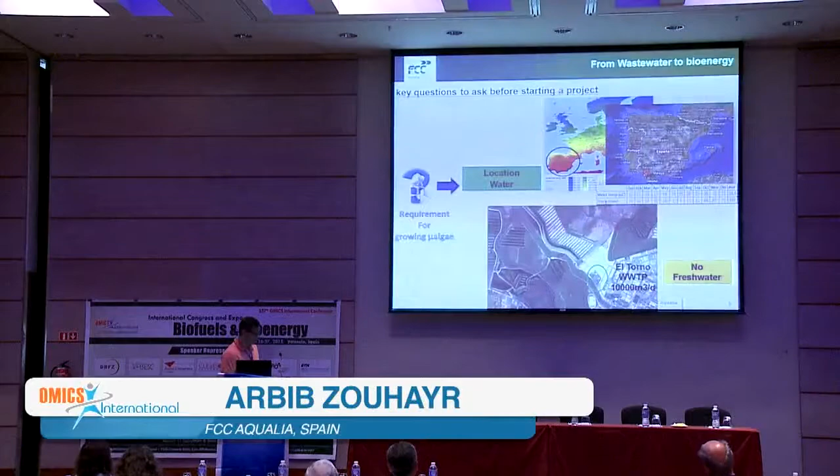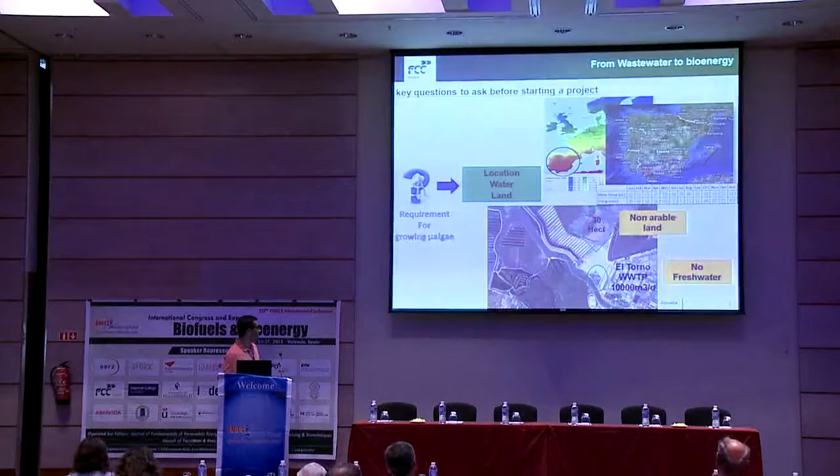And the third question is the land. As in the other case, depending on the technology selected, open system or closed system, cultivation of algae requires a high amount of surface, especially the open systems. So we must select non-arable land for not competing again with the human needs. We selected Chiclana de la Frontera because we have hundreds of hectares of abandoned salines ready for using and growing algae.

Another interesting question to solve is what kind of photobioreactor. I think Dorinde showed us a great presentation about the comparison of technologies. But according to our experience, there is a long-term discussion between the advantages and disadvantages of open and closed systems. But this comparison must always be made considering your final objective of the biomass.

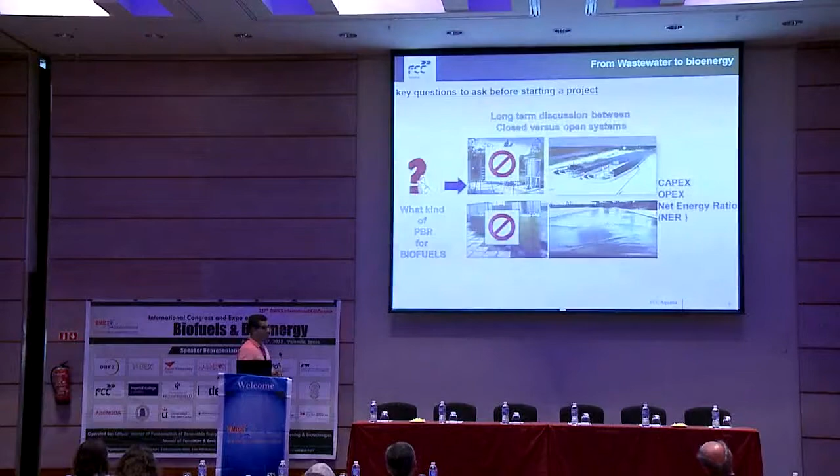In our case, deciding what kind of photobioreactor to use was very easy indeed. We analyzed the capital cost, the operation cost, and the net energy ratio. For biofuels, you must do this deep analysis of what kind of photobioreactor to implement at the end. In our case, we decided not to use a closed system because the capital cost is very high, and according to our calculation, the net energy ratio is lower than 1, so we are not interested in it. We are putting more energy into the system than the energy we can get from the biomass.

And of course, the well-known disadvantage of this kind of system is contamination. But we work with wastewater. We don't care about contamination. The low control of the process: our objective is to have a very simple process, so we don't want to control every parameter of the raceways or the downstream of the process. And of course, the low productivity in comparison to closed systems.

Summarizing a little bit, the big questions to solve: first of all, select properly the location where to implement your project. Light and temperature are very important. No drinking water, no arable land. We don't want to compete with agricultural activities. We must use robust, simple and low-cost photobioreactors. And finally, in our case, we want to work with open systems and wastewater, so we cannot try to work with pure systems.

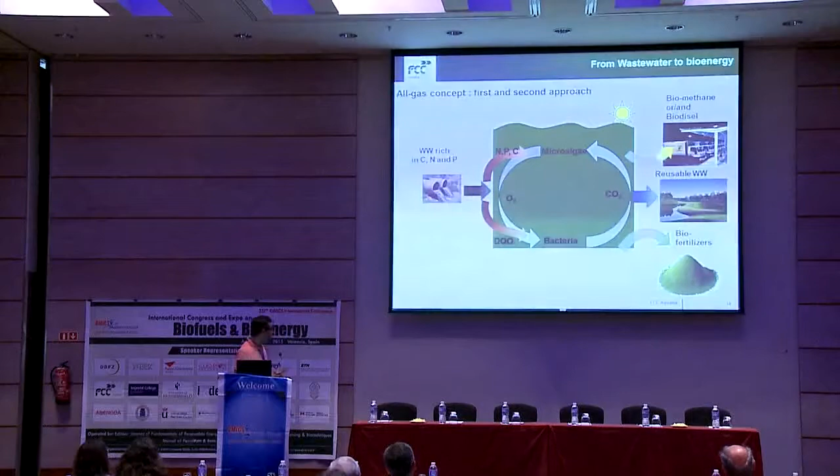The Allgas process is based on the interaction between microalgae and bacteria. When we have these two microorganisms together in a culture medium, they work symbiotically. That means that the microalgae use the sunlight and the nutrients contained in the wastewater, mainly carbon, nitrogen, and phosphorus, to grow, to multiply, and to produce oxygen. This oxygen is used by the aerobic bacteria to degrade the organic matter, the COD, and to transform it into CO2 and water. This CO2 is again used to satisfy the microalgae inorganic carbon demand.

So we produce biomass for biomethane or biodiesel, and reusable wastewater. We have an economic benefit by treating the wastewater, which is an added value of our system. And also we have a biomass with great biofertilizer capacity. This is the first approach of the Allgas project. The second approach is based on the fact that wastewater has a high energy content, around 4 kilowatt hours per kilogram of COD contained in the wastewater.

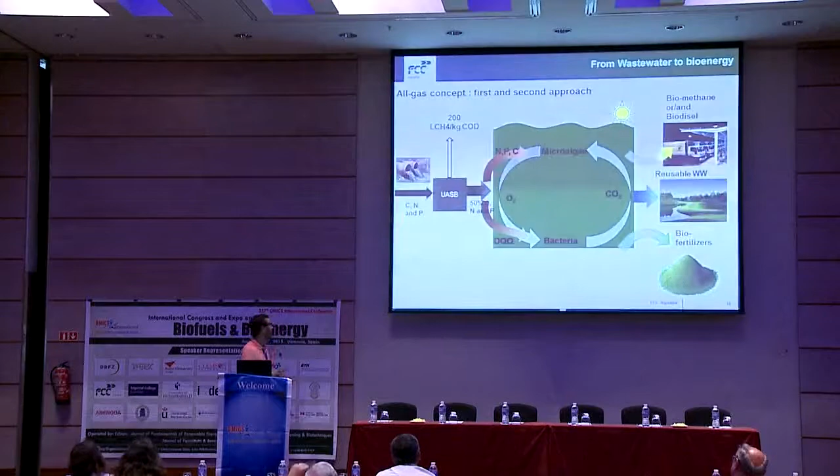So the second approach is based in the pretreatment of this wastewater by a UASB reactor, an upflow anaerobic sludge blanket, where we transform part of the organic matter contained in the wastewater into biomethane. The average yield of biomethane of this system, operating at ambient temperature, is 200 liters of biomethane per kilogram of COD. And the rest of the nutrients, the nitrogen and phosphorus, remains constant. So we send it to

the algae ponds. Now I will show you one of the final diagrams of the All-gas project. As I said, we pretreat the wastewater in UASB reactors, big-scale UASB reactors. We produce a biogas, which is composed by biomethane and CO2, and a pretreated effluent, which we send to the cultivation area. In the cultivation area, we remove the nitrogen, phosphorus, and carbon, and we produce biomass. Then we harvest, we pre-concentrate the biomass in a harvesting skid.

And here we have two alternatives of managing the biomass produced. In alternative one, which is the most attractive for us, we digest directly the biomass obtained after pre-concentrating. We reach 3–4% of total suspended solids. We digest it, we produce a biogas. The CO2 produced in both anaerobic processes, the UASB and the anaerobic digester of the biomass, will be used to satisfy the inorganic carbon demand of the ponds, together with the CO2 produced by the bacteria.

The biomethane produced in both anaerobic processes will be mixed, upgraded, and sent to a gas station to feed the Volkswagen cars. The residual biomass of the anaerobic digester will be dewatered in a centrifuge. We don't care here about the energy because the flow is very small, because in the previous pre-concentration step, we concentrated at least 100 times the volume. Then we solar dry the dewatered biomass.

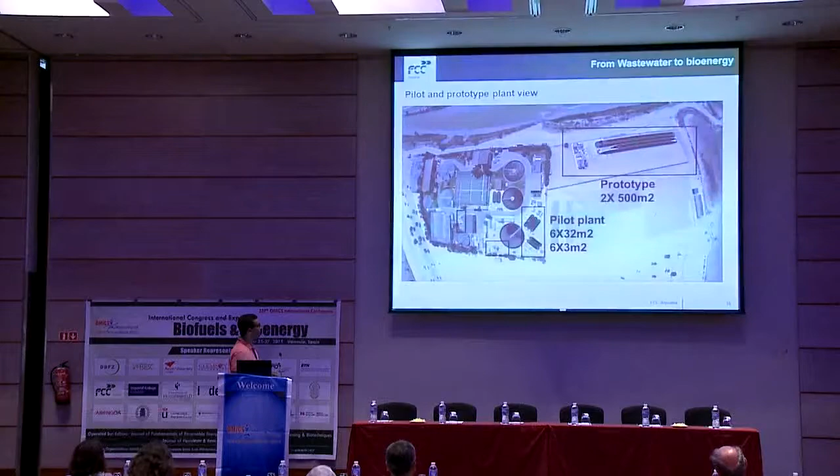So this is an aerial view of our plant in Chiclana de la Frontera, the pilot plant inside the wastewater treatment plant, and in an external area, we have the prototype plant, 1,000 square meters. The pilot plant is composed by a complete pretreatment of the wastewater, composed by three 20 cubic meter UASB reactors, and a complete downstream upgrading of the biogas, composed by sulfide removal, methane stripping, and gas holders.

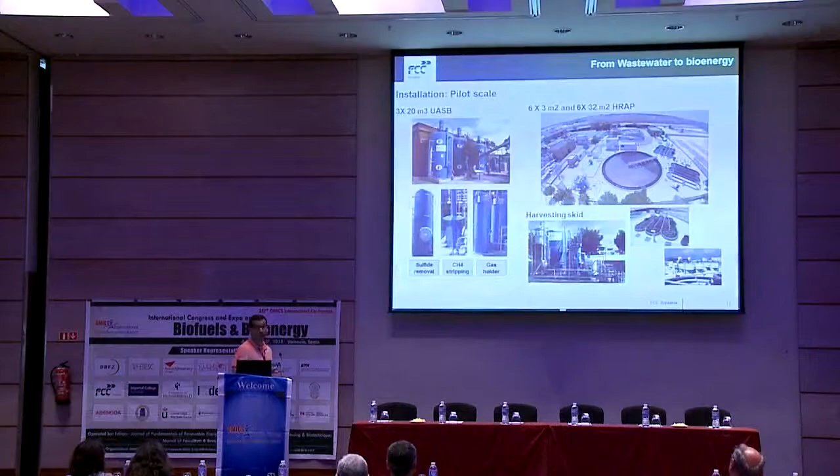And the cultivation area of the pilot plant is composed by six 3 square meter ones, those ones, and six 32 square meter, those ones, high-rate algal ponds, and a complete harvesting skid where we try to harvest the biomass through sedimentation, filtration, and dissolved air flotation. And the option that worked better was the dissolved air flotation process.

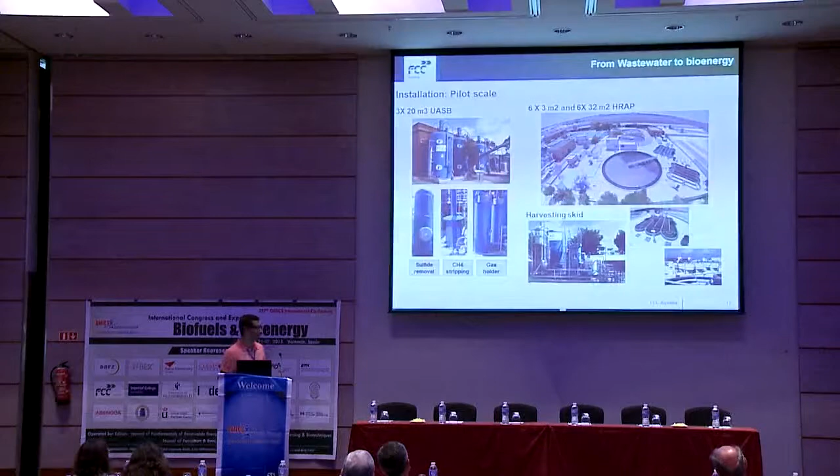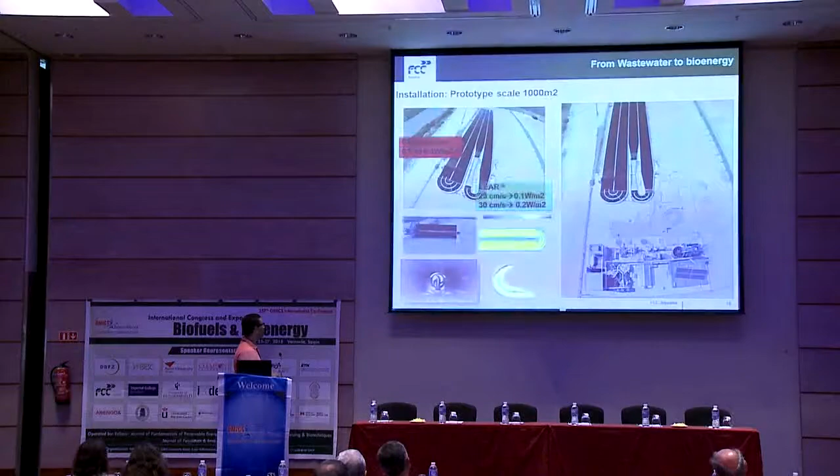The prototype plant, regarding the cultivation area, is composed by two 500 square meter reactors. The left one is based in the typical raceway pond, where the liquid is circulated by a conventional paddle wheel. And the right one is a new innovative low energy algae reactor, where we made a deep modification of the bends, and we changed the paddle wheel by a flow booster with a submersible mixer. What we got with this modification was a drastic reduction of the energy consumption in the step of cultivation, which was very high.

Operating at 25 centimeters per second of liquid velocity, we passed from 0.6 in the paddle wheel to 0.1 watt per square meter installed in our installation. Regarding the downstream of the prototype plant, it's composed by pre-concentration based in a dissolved air flotation process with a treatment capacity of 20 cubic meters per hour. In this step, our minimum concentration factor is 100, and we can reach even 150 and 160.

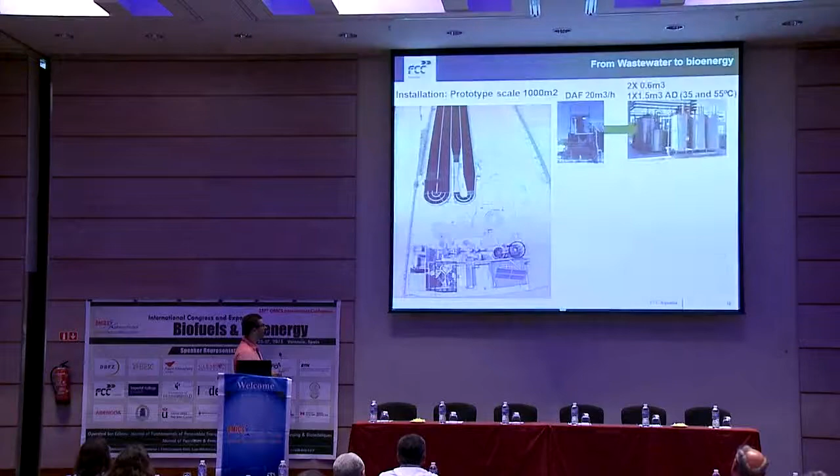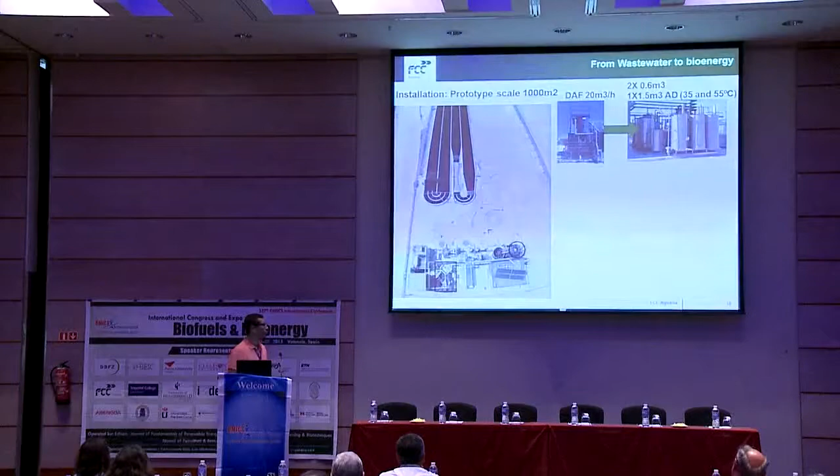Then this pre-concentrated biomass is sent to the anaerobic digesters. We have three, two of 600 liters and one of 1,500 liters, operating in mesophilic or thermophilic range. As I said previously, the residual biomass is centrifuged in a decanter centrifuge, largely used in wastewater treatment processes.

The wet biomass is sent to a greenhouse solar dryer provided by Huber, a German company. This solar dryer is enhanced by air solar collectors, so we reduce the solid retention time inside the greenhouse to reach a final concentration of solids of 95%, 5% of water.

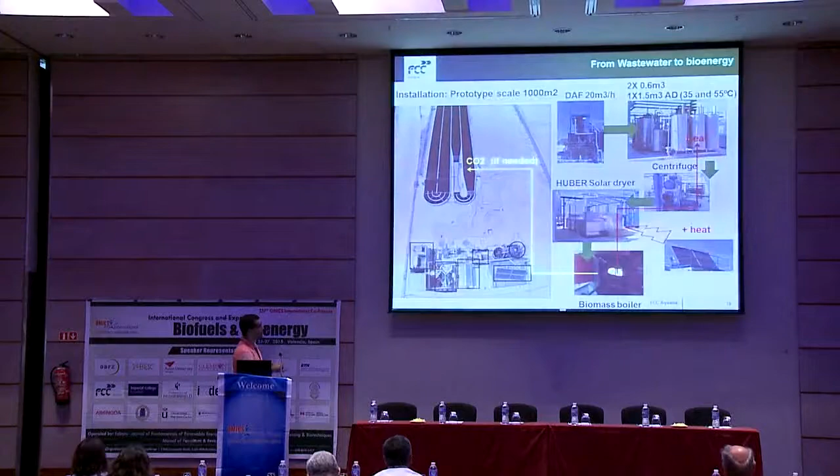Part of this dried biomass, mixed with green waste, is burned in a 25 kilowatt biomass boiler. Part of the CO2 we send to the ponds, and the excess heat we send to the anaerobic digesters.

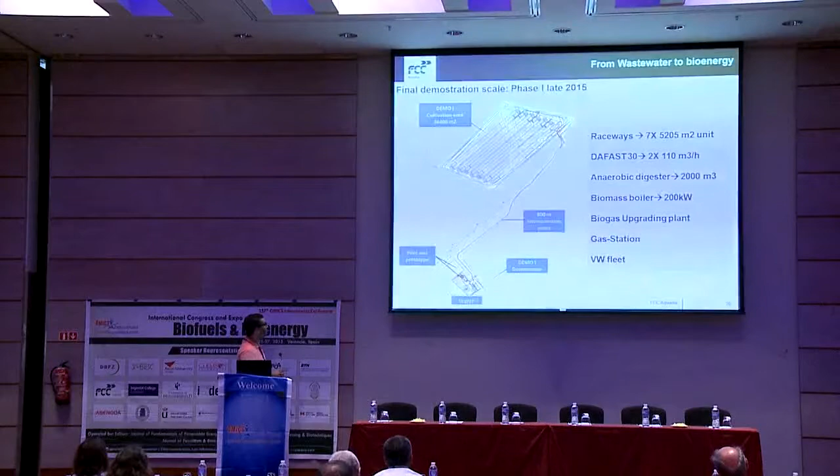This is the pilot and prototype, and this is the view of the space that we have available for scaling up the process. It's near the wastewater treatment plant, and we have more than 100 hectares available for upscaling our process. The demo, the first stage of the final 10 hectares, will be composed of 7 raceways of 5,200 square meters each.

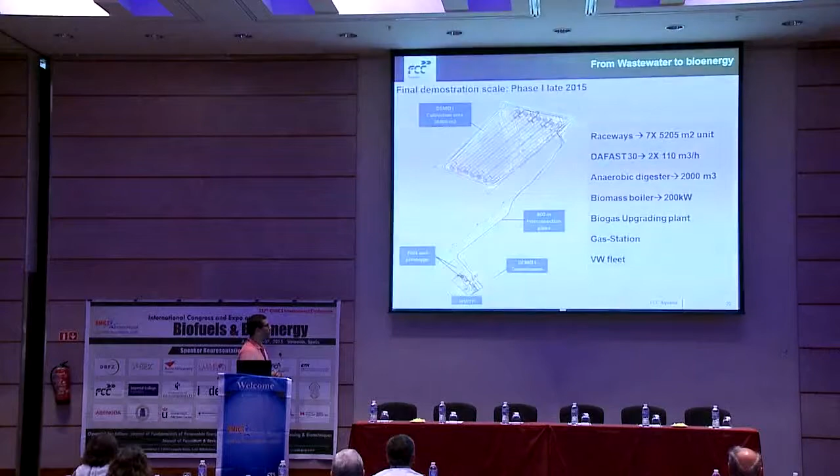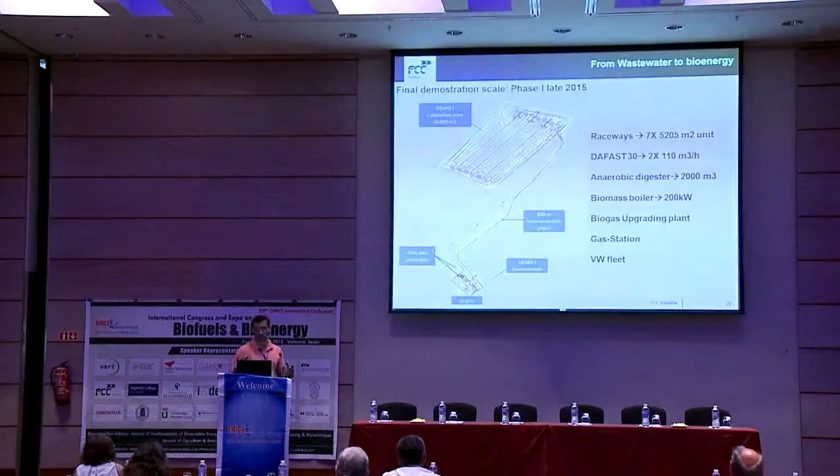We will also install 2 units of dissolved air flotation systems with a total treatment capacity of 220 cubic meters per hour, a 2,000 cubic meter anaerobic digester, a 200 kilowatt biomass boiler, a complete biogas upgrading plant, a gas station, and a Volkswagen car for testing the gas obtained in our plant.

2 minutes? Oh, 2 minutes.

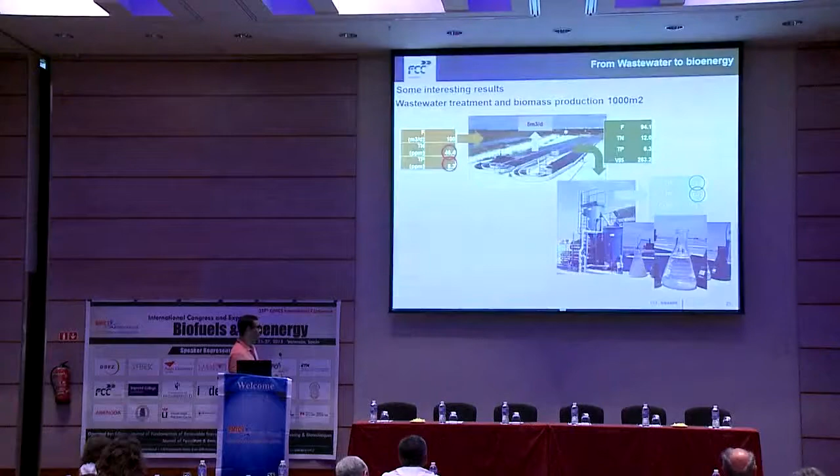Regarding the biomass productivity, we are between 75 and 110 tons of total suspended solids per hectare per year. We are near the target of the FP7 call, which was 90 tons per hectare per year.

Regarding the bioenergy capability of our process, we operated 3 anaerobic digesters in the mesophilic and thermophilic range of operation, and the results obtained were similar to those obtained in the conventional wastewater treatment plant. But we have to note that the biomass produced in the All-gas process is 3 or 4 times higher than in the conventional wastewater treatment plant. Therefore, the energy production capacity of our process is very high. But we know that we can increase this biomethane yield even further.

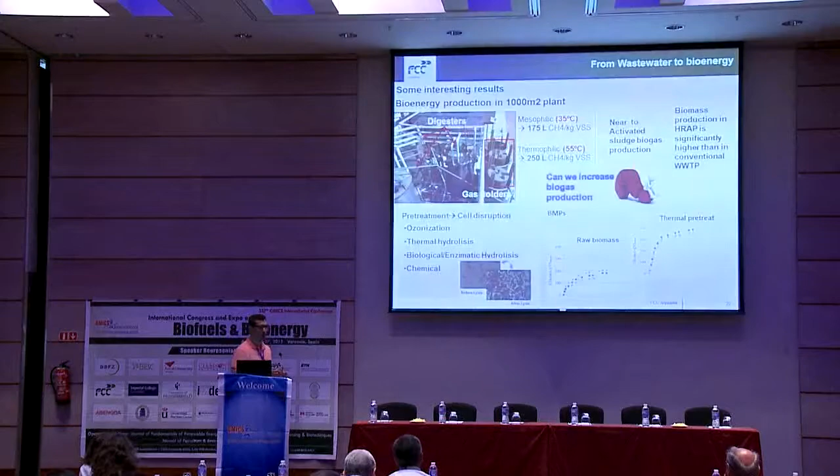Now we are working on pretreatment of the biomass with the aim of cell disruption, of the cell wall of the algae. We are testing different techniques: ozonization, thermal, enzymatic, and chemical. This is just an example of some BMPs, biomethane potential experiments, obtained with raw biomass and thermally pretreated biomass, at 170 degrees Celsius and 6 bar of pressure. And as we can see here, we can increase the biogas yield of our process 2 times.

And finally, using all the data obtained in the prototype plant during 1 year of operation, we made a balance where we compare a conventional wastewater treatment plant, at your left, and the All-gas process: the final 10 hectares of cultivation, or 10,000 cubic meters of wastewater treated. Regarding the electrical consumption, with the new concept of the All-gas project, we can reduce the energy consumption required for treating the wastewater by more than half.

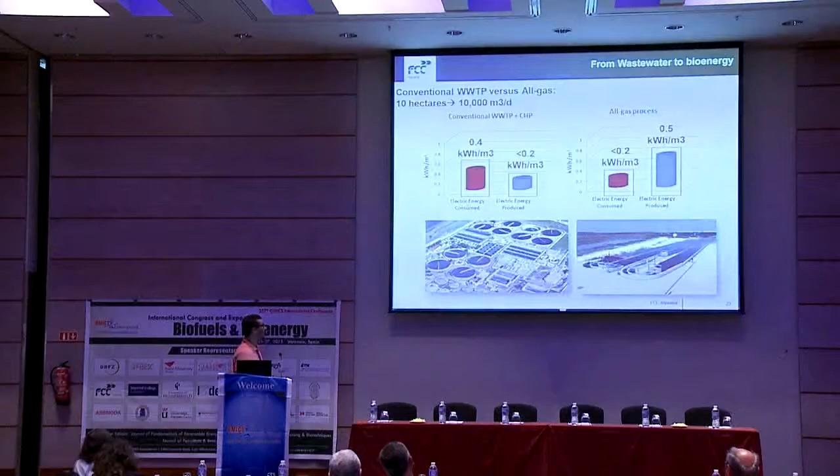On the other hand, the energy produced in the conventional wastewater plant is lower than 50% of the energy demand of the plant. In the case of the All-gas project, we can produce more than 2 times the energy that we need for operating the plant. So we have an excess of energy in our plant. We have a self-sufficiency of nearly 250%.

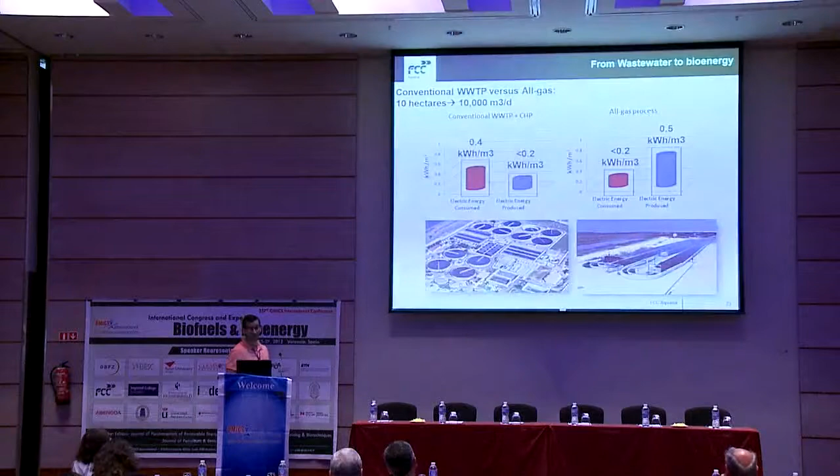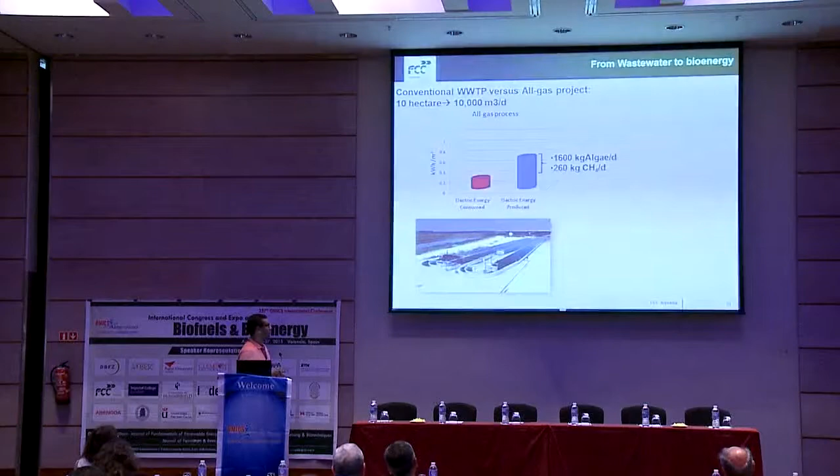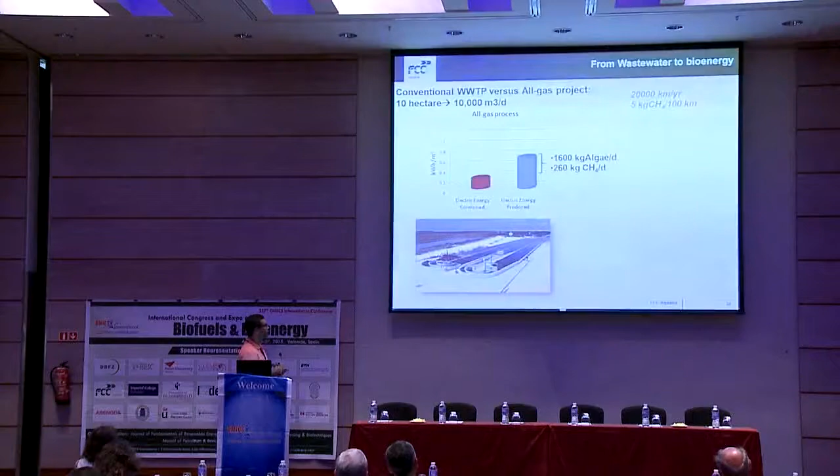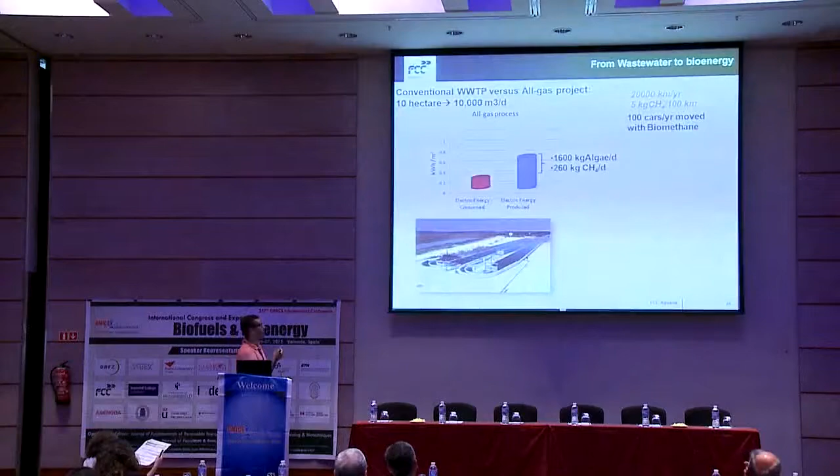If we focus on the All-gas project, this excess of energy, after satisfying the demands of our plant, is equivalent to more or less 1,600 kilograms per day of algae, which is more or less 260 kilos of biomethane per day, after satisfying all the electrical demand of our plant. Doing some quick numbers, if we consider that a biogas car consumes 5 kilos of biomethane every 100 kilometers, with this excess of biomass in our plant, we can run 100 cars, or we can travel around the world 4 times.

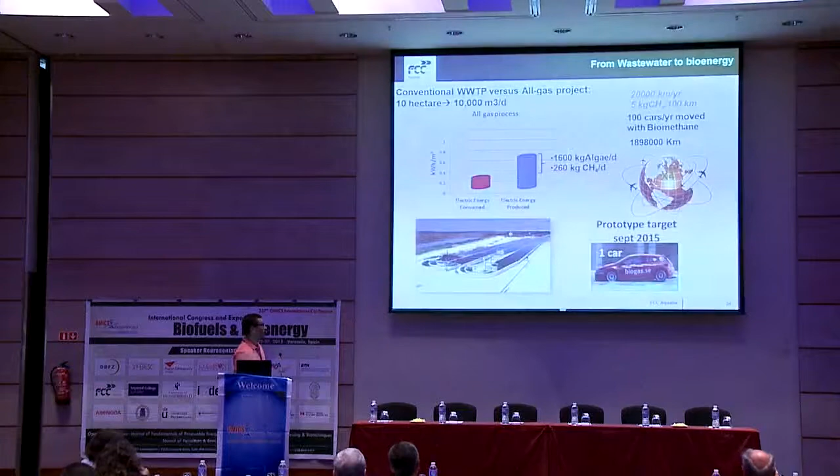Our next objective, next month, is to start feeding the first car with the biogas produced in our 1,000 square meter prototype plant. Thank you so much.